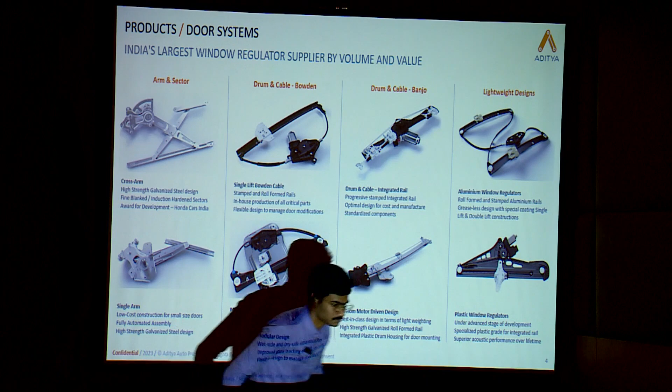Today's state of the art is what you see in the middle, the drum and cable type window lifters. In the age of EVs, power windows become much more critical because there's no noise from the engine anymore. What was an accepted criteria for customers before, suddenly people start hearing the power windows much better, and the parts have to go through a dramatic change. So noise is very critical, and weight is very, very critical, because in EV range, weight influences range per charge. This product has gone through a lot of evolution.

In keeping with this evolution, look at the bottom right product there. That's one of our latest innovations, just launched: the entire plastic window lifter, which was earlier done in steel, and today's state-of-the-art is aluminum. We designed the entire window regulator out of plastic, and this has two benefits specifically for EVs. First, it is very low weight. Second, the benefit is noise.

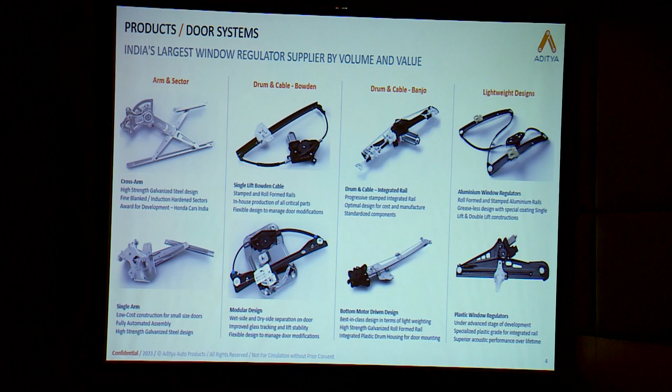All of you would have experienced, if you hold your mobile phone in your hand, it has a certain volume. The moment you place it on your desk, it amplifies, because the desk behaves like a speaker. By the same principle, when you mount the motor, the noise-making member of a power window, on a steel or aluminum frame, it amplifies. But when you mount it onto a plastic frame, the noise gets deadened, using the same principle of structure-borne noise isolation. So again, it's designed for EVs.

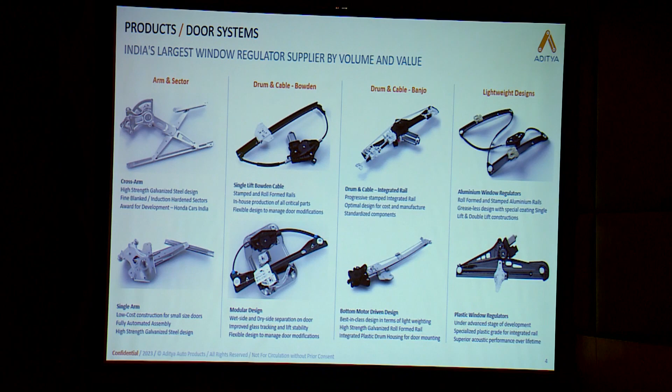This is just an example of how, even though our product did not go through obsolescence due to the advent of EVs, it went through a transformation. That's just one example.

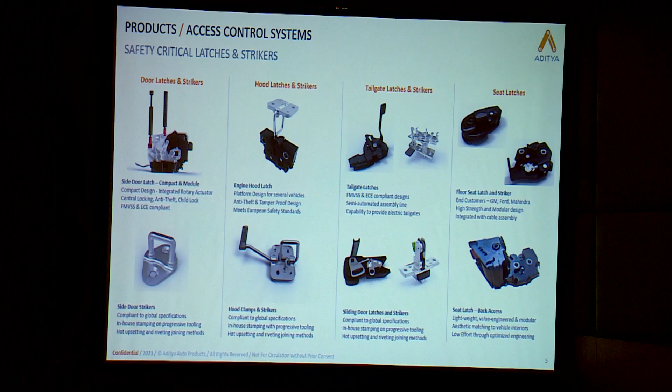Other products we do include latches for side doors, hoods, and tailgates, as well as door hinges and door checks. Each of these products has its own kind of metamorphosis, because even though they aren't influenced by the powertrain in EVs, they still go through transformation since they need to be lightweight and better on noise.

This is the main division my presentation is about today: motors. My father had the vision and foresight to see that we could not remain in power windows without being in motors. Up until 2006-2008, we used to buy all our motors from Japanese and German companies, and these companies would obviously quote much lower prices to our Japanese or German competitors than to us.

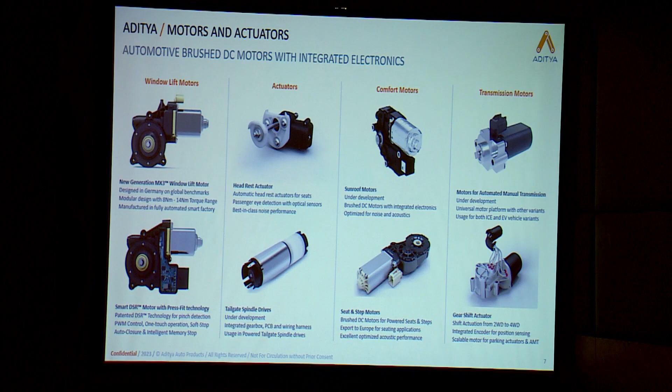So to stay alive in this business, we needed to get into motors. Now, Aditya had no experience in motors whatsoever, but my father set up a team in a separate location, and really from the ground up, starting with hand calculations, we set up the first motor completely independent, without any foreign collaboration, in the Indian market. This product, just like any other product, is a story from 2010, and like every other product I've discussed, it has also gone through an evolution.

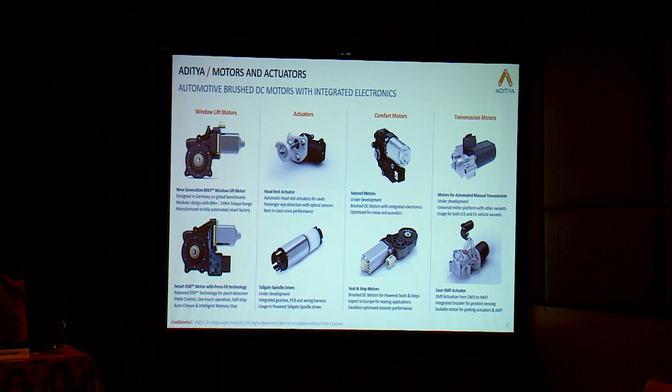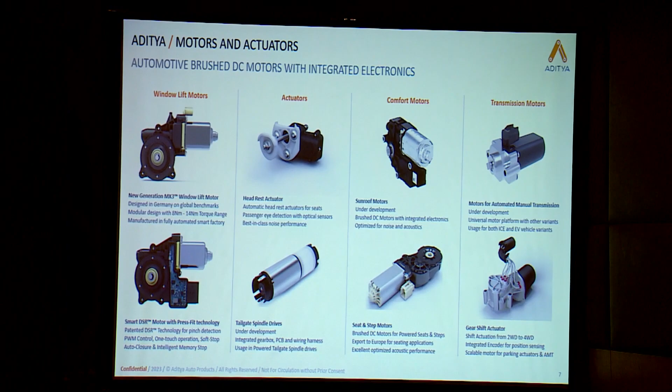You would have seen now, every power window in most cars you're driving, with a single flick of the switch, the glass goes up, and with a single flick of the switch, the glass goes down. This requires an electronic control unit to allow this to happen.

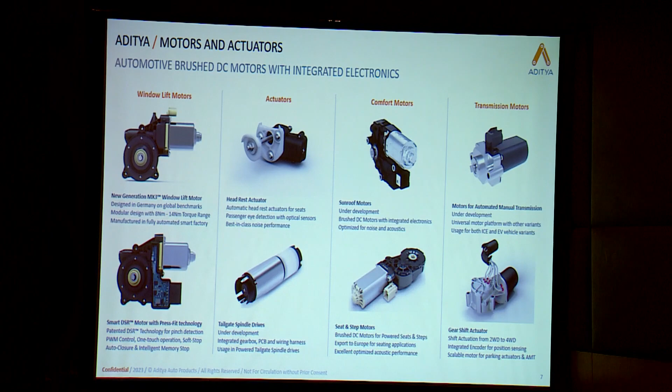So this product, like every other product, is going through further evolution. What is this evolution? Today, there are several ECUs inside the door of a car. There's a separate ECU that controls your mirror fold. There's a separate ECU that shows your company's welcome logo, projected from the mirror onto the ground. Your door has ambient lights, switches have lights - all of these require their own ECUs.

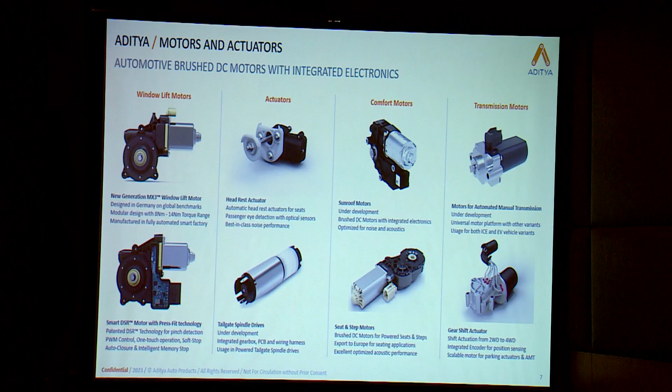But now the next step we've taken in this product evolution is: why not integrate all the ECUs in the door inside that motor? That way the customer doesn't have 5 ECUs to talk to, doing 5 small functions. It's just one ECU that controls the window lift, having had an ECU in me anyway, take over the functions of mirror fold and mirror lowering. So that is today's state of the art that we have.

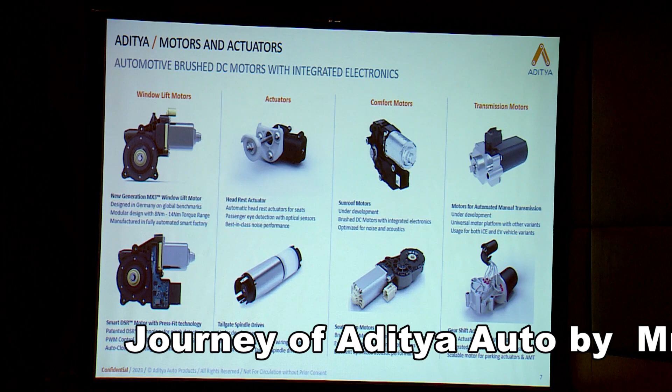It's no longer a window lifter motor - it is actually a door. It's a window lifter motor with an integrated door control module, electronics. So that's where we are today.

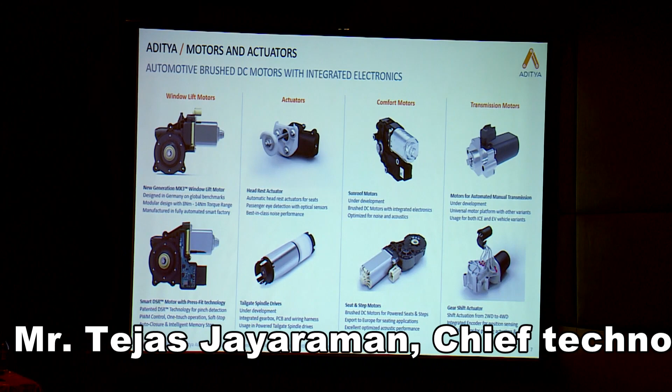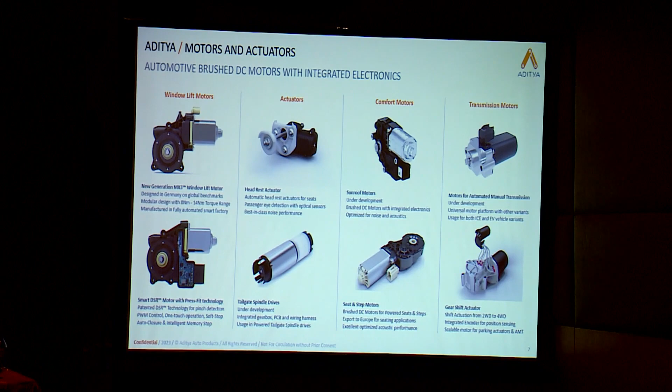Another interesting product is the headrest actuator, the second one from the left. This is an interesting product - a German company, a customer asked us. They were buying all their headrests from our competitor, a similar journey they were going through. They asked us: can you develop a motor that will actuate our headrest automatically depending on the driver who sits there - depending on the driver's eye position, locate it and locate the headrest automatically. In doing so, they said all my competitors are German companies, please at least be on par with the German companies on noise, do not be worse, because this is the first attempt.

We took this up as a challenge, and today I'm really happy to say that this product is the benchmark in noise and acoustic performance in all this world. So in all the competitions that happen - Mercedes-Benz and others - it is a phenomenal achievement.

On that point about Indian engineers - I learned German to interact with my German customers. But 2 weeks ago, I was in Germany to talk with 5 customers of mine, and interestingly, 4 out of those 5 companies had an Indian engineer who was the decision maker, the main person to talk to. So the smartest guys right now in German companies are Indians.

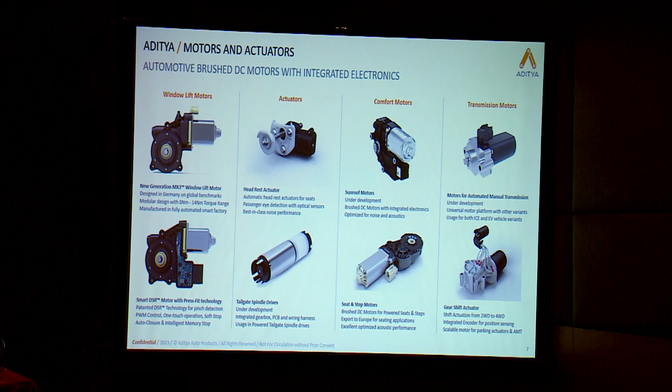And I was thinking, instead of learning German, I should have learned my wife's language, which is Malayalam - that would have really helped me out much more. Anyway, that's just an aside. Let's go on to the next slide.

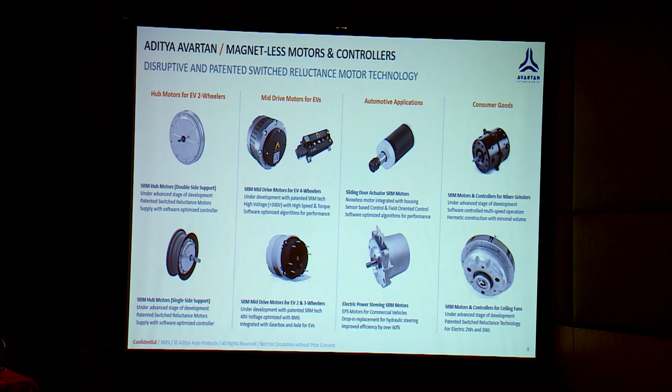Today, Aditya is also innovating in a breakthrough technology of a switched reluctance motor for EVs and different applications. Today, if you go beyond brushed DC motors, the state-of-the-art technology is brushless DC motors. Now brushless DC motors have one trait - you need to use rare earth magnets, and rare earth magnets again have a dependency on China. So we are designing motors right now using switched reluctance technology, which only uses the principle of electromagnets - copper and iron, nothing else - and reluctance torque to generate the motion.

This is a breakthrough because it completely de-risks the dependency on China for brushless DC motor technology. And going forward, we see a trend in automotive where EMI, EMC, noise, and similar requirements are becoming so critical that motors are slowly moving from traditionally brushed into brushless. So this is another huge potential for us. Now we have developed a whole catalog of motors using this switched reluctance technology.

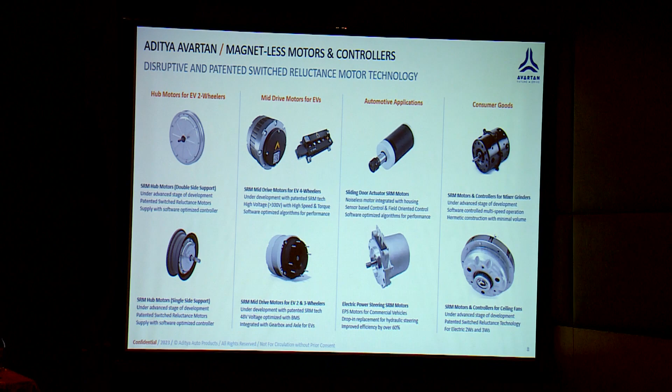This, for the government of India, is a crucial technology as well, because it reduces our dependence on China in the entire supply chain. Next slide.

When we set up our electronics department, it was not only the electronics for the window lift. We now make the electronics for ship controls, things to control its defense. For example, in a ship, there are 5 different engines. If one engine breaks down, how do the remaining 4 take over the function of that one engine? If 3 engines break down randomly, how do the remaining take over the function? So these sort of ECUs, several different ECUs, for example for the seat control, not very different from a window lift, taking over the function of designing the ECUs for this. So these are some of the products that we are making.

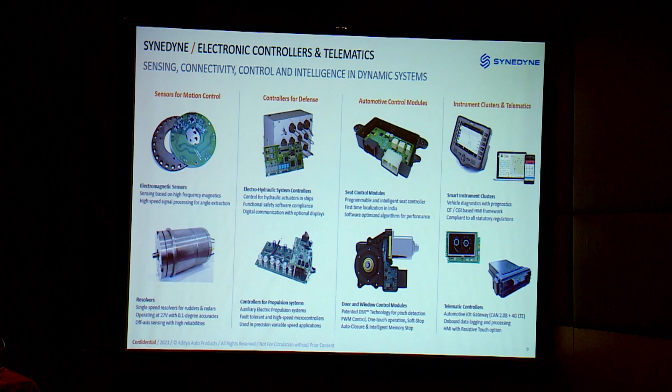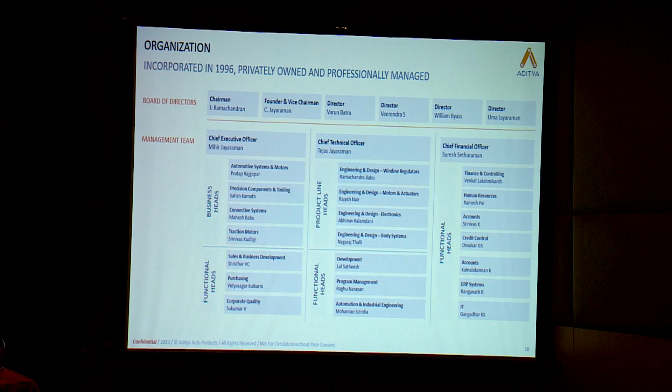This is an organization chart. My father started this company in 1996, and today on the day-to-day operations, it's myself handling the technical functions, Tejas Jayaraman. My brother handles the commercial functions, and we have a CFO, Mr. Suresh, who takes care of everything else.

Now, on our journey for manufacturing excellence, we can go to the next slide.

Why do we get into this journey, and what is the basis for getting into this journey? We looked at global megatrends, what's happening in the world: global warming, post-pandemic digitization, cybersecurity, artificial intelligence, inflation caused by political instability. These are some of the global megatrends. How do these global megatrends influence our automotive world, the world in which we operate?

Based on that, we see things like shared mobility, driverless cars, zero emission technologies, e-fuels, autonomous driving, and stricter safety norms. Based on these global and automotive megatrends, we have set up our focus areas, broadly classified into 4. Some of the examples I've already discussed: mechatronic systems, not just doing electrical or mechanical systems, but the entire system, mechatronics, electronics, mechanical, electrical.

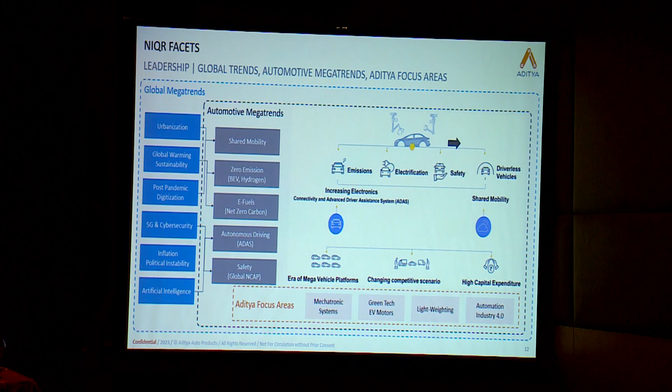Second one is to focus our R&D developments and process developments on EVs and motors for EVs, motors which are solving a problem on efficiency, which is resulting in global warming, etc. Some examples I will come through in my presentation. Lightweighting, of course. And none of this is possible without manufacturing excellence, because product development is one part.

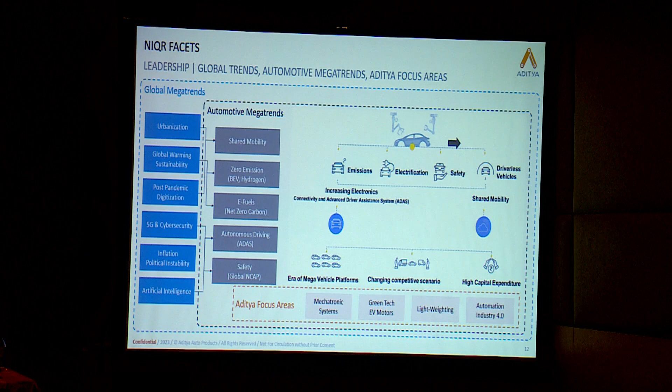For manufacturing excellence, you also need to really get into automation, because we cannot rely on labor or our labor cost advantage, seeing the example of China's labor costs going up. It's just a matter of time before India goes through the same thing. So how do we prepare ourselves to be future ready? We have to really invest our time and resources into automation today so that we are ready for the world tomorrow.

This slide, I've explained a bit of it already, but this is our journey. We started in 2008 with motors, and then we launched our first generation motors at 800 motors a day. Second generation of motors, in 2014, we were producing 1,500 motors a day.

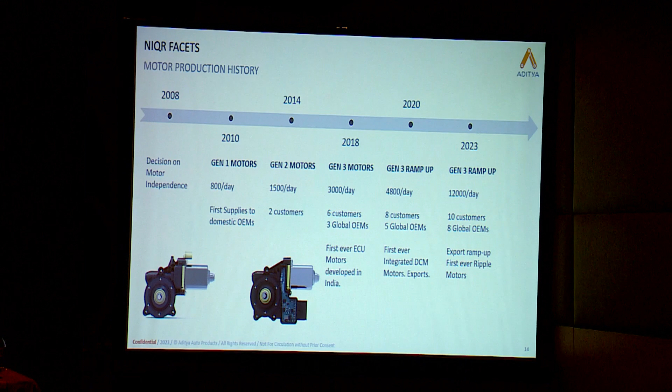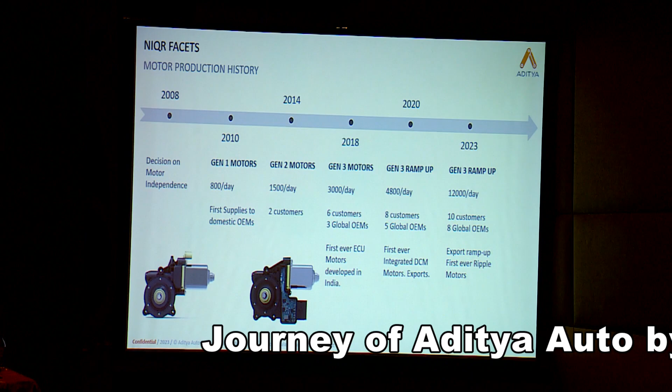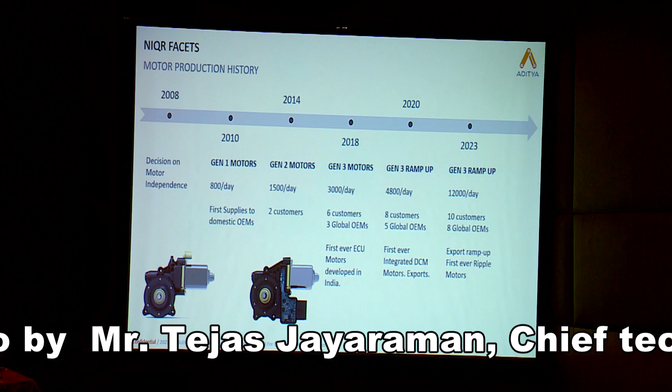2018, we took a dramatic switch towards launching our latest generation motors with the electronics. This went up to 3,000 motors a day, and today we are still going through a very steep ramp up. Today, at this moment, we are producing 12,000 motors in a single day. It has been a very stressful time, but it's been a very positive stress, as I would say.

So, of course, you need to do this. How do you manage this ramp up? How do you manage your customer expectations? How do you manage customer satisfaction? And this kind of a dramatic ramp up, going from 3,000 to 12,000 motors in a single day? So we embarked on our lean journey.

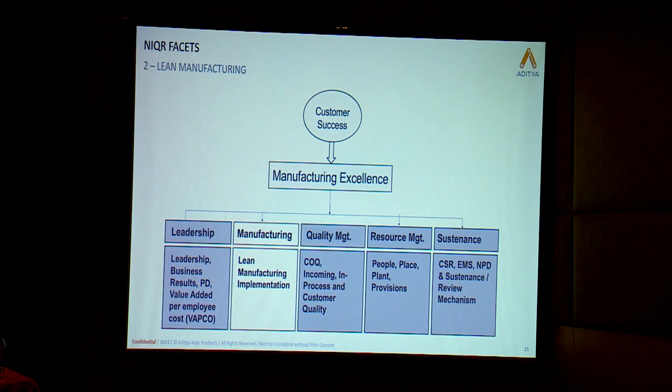One of the things we realized is, one, to have this automation know-how in-house, and two, to be completely independent, that we build our own assembly lines, at least the most critical machines in each of our assembly lines. So we make our own assembly lines, we do our own automation, and the critical operations are all done in-house.

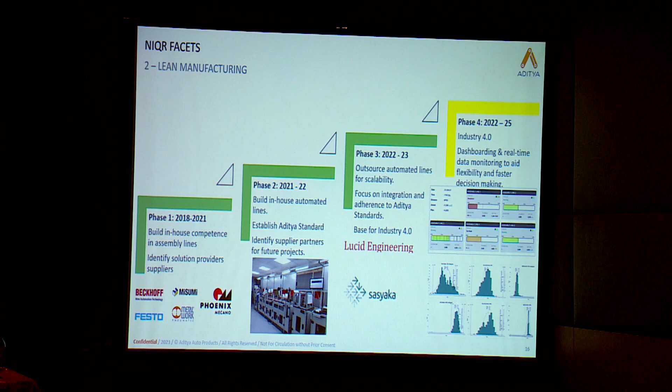So we started this journey way back in 2018, building our own in-house competence first. Then in the next phase, we established an Aditya production standard, so that all vendors would build to the same standard, and with that we could outsource more of the assembly lines and still have homogeneity in our automation. That was the second phase.

The third phase was to outsource these lines, and we've been able to do this quite successfully, such that now any line, whether built outside, to Aditya standards, or built in-house, all speak the same homogeneous language. Now, today where we are is Industry 4.0.

We have automated, but the next step is, since we make our own lines and our own end-of-line testers, why not use them? An end-of-line tester does a lot of things we need in Industry 4.0. It gives you real-time production count if you just tap into this data. It's also by nature a quality testing equipment, so you can easily pull out CPK data, so quality data can come from this too.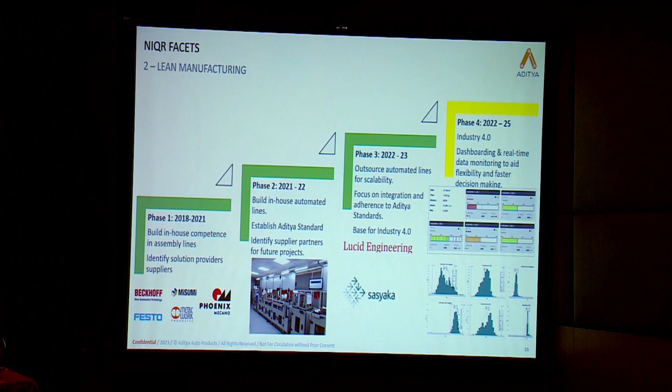And the next thing is traceability. So building on the fact that we built our own end-of-line testers, we built our own Industry 4.0 platform, connecting all these units to our centralized server. Now we've made a first step in Industry 4.0 with live production, live quality, and live traceability.

So this is a look at our cockpit. Basically in a single cockpit you see the entire production in the plant. You see which shift performed well. It is already driving a lot of decisions.

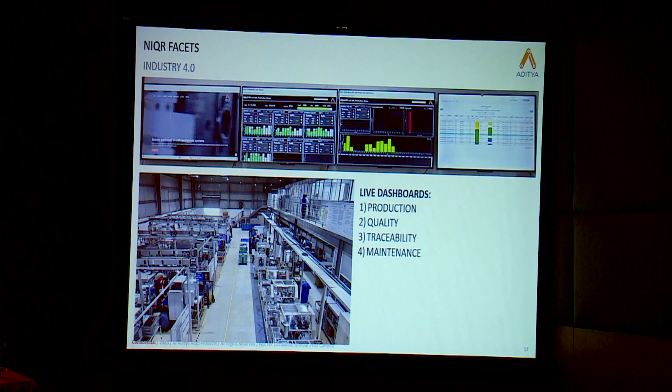For example, the first decision it drove inside Aditya, from the visibility we got, was that a 12-hour shift into 2 makes no sense. It's much more sensible to do 8 hours into 2 shifts or 8 hours into 3 shifts because of the efficiency, since we are able to see this. We hear it, but this time we can actually see the bar graphs dip towards the end of the shifts. So it gave us a lot of visibility.

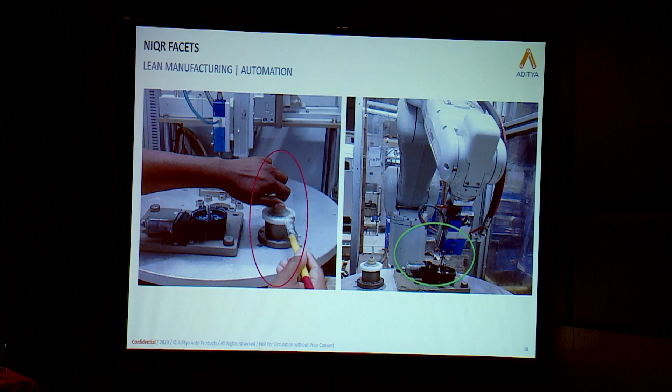This is just an example of some of the automation we did. One of the most painful ones was to grease automatically, because our operators would always say that ultimately, to spread it to the right place where it needs to be, we need to do it by hand with a brush. But we took this as a challenge, that we would not let our line become manual. So this was one of the things we managed to do with an articulated robot, and today this has also been successful.

Then quality, let's go to the next slide. Our product is... how much time do I have? Sure. On quality, one of our biggest challenges is that our motors are highly subjective in the noise.

Because a power window has 4 motors in a car, and the end user has a very subjective criteria by which he defines it. Every OEM has a spec, this many dB, but no OEM actually even uses that spec, because all 4 motors need to not only meet the spec, but also sound exactly the same. Because if you have one phenomenal motor out of 4, or one out of 4 which is slightly off, the end user would say this sounds different, so maybe the remaining motors are faulty. So we need to build the consistency.

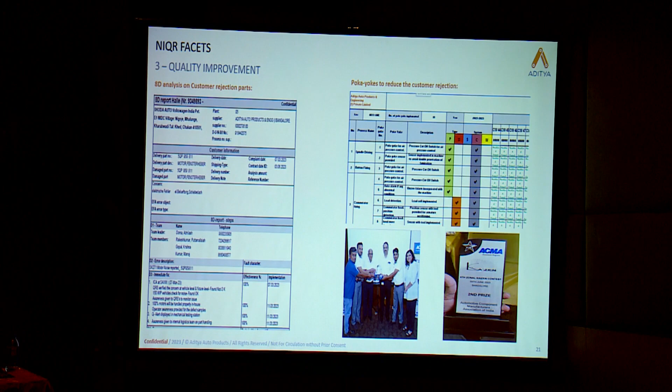So, previous slide please. Today's state of the art is to use not just a dB criteria, but also frequencies, a frequency spectrum to analyze not only the level of the noise but also the quality of the noise. That is today's state of the art. But that is also found to be lacking from our experience, because it ends up filtering too many good motors which were otherwise good.

So to really capture the subjective part of it, we are now using AI, because artificial intelligence is excellent at identifying your handwriting, however bad it is, and converting it into digitized text. Why not use that technology to convert a subjective noise into an objective criteria that our end-of-line testers would use?

So we are right now working with the Indian Institute of Science to build a neural network to see if artificial intelligence can help us identify the subjectivity in the noise. It's our dream to really make this an objective criteria to accept or reject a motor, not depend only on operator subjectivity.